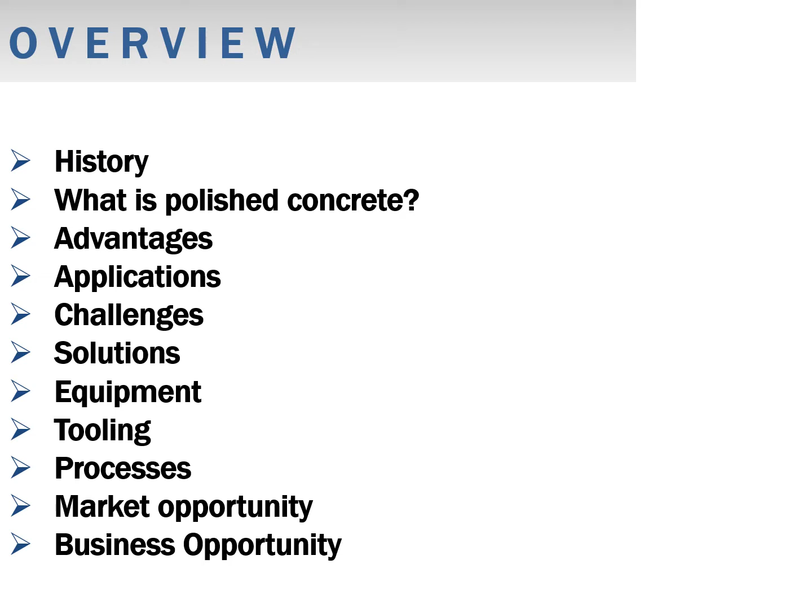Today's webinar is going to talk about the history of polished concrete, what exactly it is, the advantages of polished concrete, some of the applications we see it in, the challenges that are associated with polished concrete, and some of the solutions that we can incorporate. Then we'll go on to discuss the equipment, tooling, and processes of polished concrete, and finally we'll talk about the market and business opportunities available.

So let's talk briefly about the history of polished concrete. Polished concrete is actually a relatively new entry into the flooring surface world. Prior to 1998, polished concrete was associated with terrazzo. We all know terrazzo as being glass, marble, or granite chips, typically bound up in a cementitious or epoxy binder, and then that surface is prepared using carborundum stones and water. That is radically different than what actual polished concrete is.

The true first polished concrete surface occurred quite by accident. It was during a Tunisian palace renovation back in 1998, where the construction crews were forced to prepare the concrete slab without the use of water. During the grinding process, they noted that the slab was taking on a very beautiful sheen with a very nice aggregate exposure. Following it to its logical conclusion, they ended up with a very beautiful polished concrete slab.

Shortly thereafter, in 1999, the first planned installation of a polished concrete slab was undertaken at the Bellagio Hotel in Las Vegas, where a 40,000 square foot warehouse space was polished. And from 1999 to today, U.S. tool and equipment manufacturers, as well as chemical manufacturers, have refined the process and continually improved it.

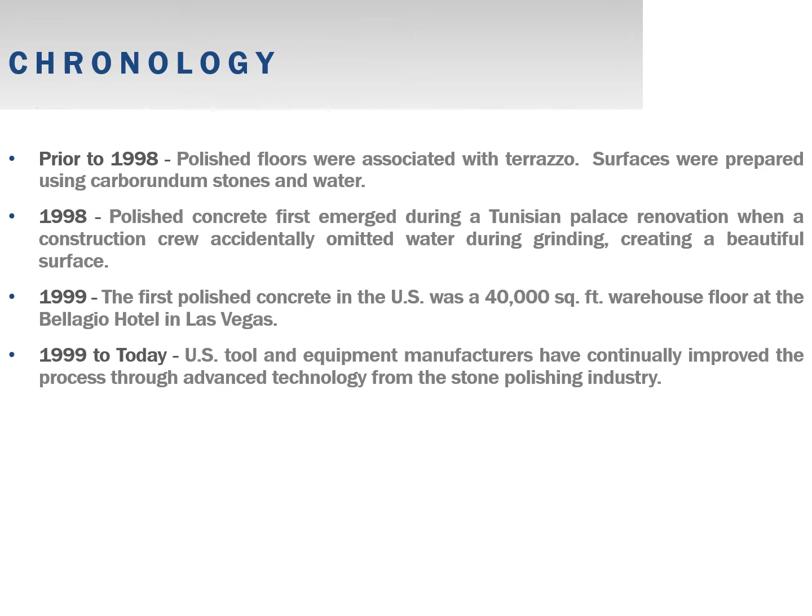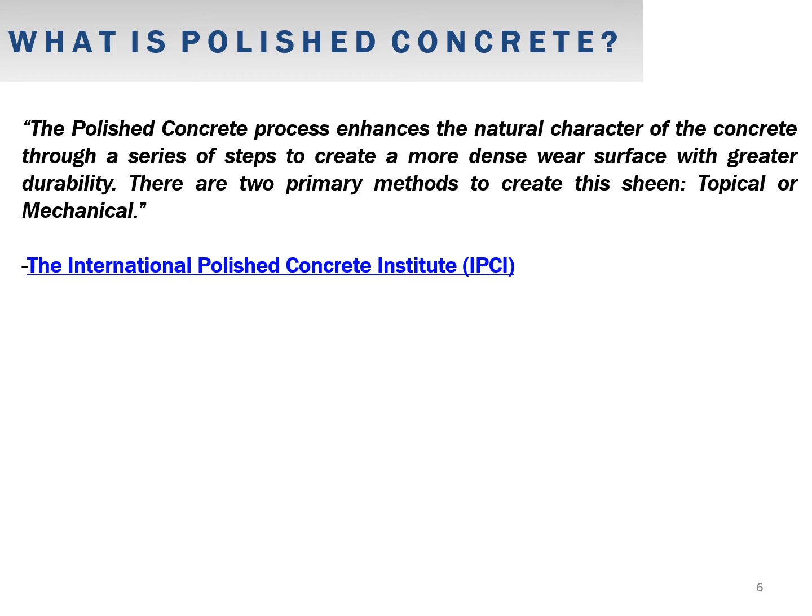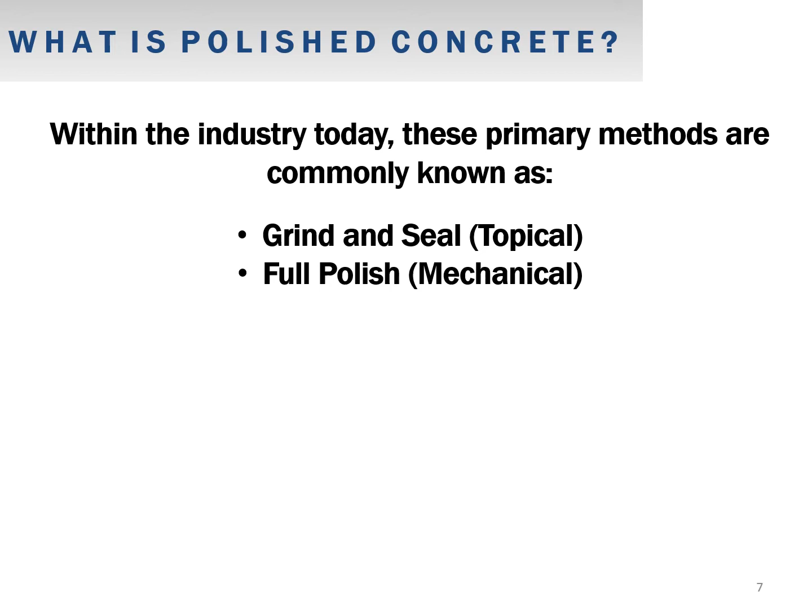So what exactly is polished concrete? Well, according to the International Polished Concrete Institute, polished concrete is defined as a process which enhances the natural character of the concrete through a series of steps to create a more dense wear surface with greater durability. There are two primary methods to create this sheen: topical or mechanical. Within the industry today, these primary methods, the topical and mechanical, are better known as a grind and seal or a full polish.

Whether it's a grind and seal application or a full polish, there's an organization out there called the Concrete Polishing Council, and they are a sub-council of the American Society of Concrete Contractors, and they have defined three different classes of aggregate exposure. Aggregate exposure and the sheen of the concrete are the two biggest considerations when dealing with a polished concrete floor.

So with the aggregate exposure chart that we see here, you'll see that the CPC has defined a Class A aggregate exposure as revealing 85 to 95% of the cement fines. So basically, all you're going to see in a Class A installation is the cement fines. With a Class B, you're going to see the cement fines as well as the larger or medium-sized aggregate, and with a Class C, you're going to see the heavier, deeper aggregate. Now, obviously, as you go down in classes here from an A to a C, it's going to require a heavier grind to expose the deeper, more larger aggregate.

The important thing to remember here is that if a specifier or an architect or designer specifies a Class A aggregate reveal, which is largely just the cement fines, and the installer inadvertently cuts through to reveal the larger aggregate, there's really no going back at that point. You cannot repair an installation where you reveal the deeper aggregates when the finer aggregates were specified for the installation. So it's important to take note of that and be aware of that.

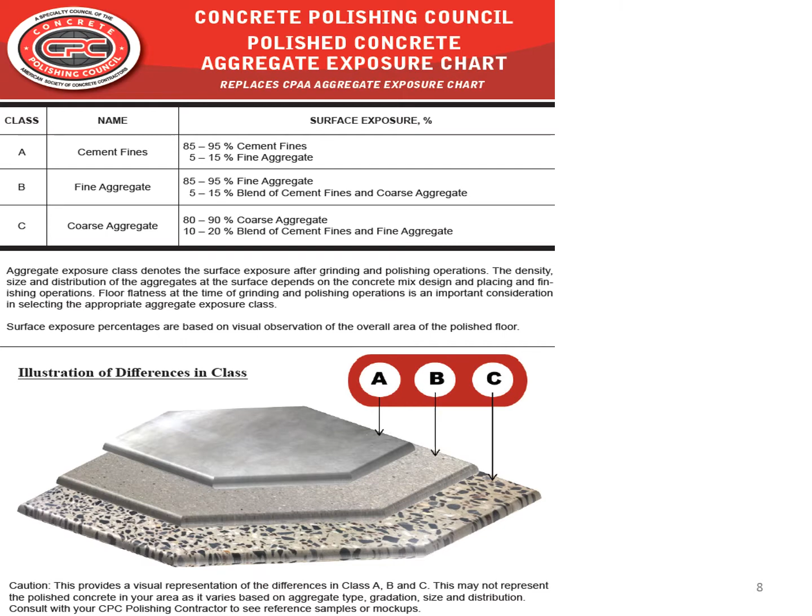Again, this is something that will be specified by the end user, by the designer or the architect. So if somebody is looking for a highly polished surface, you are going to get a highly reflective surface on the clarity meter. So it's important, again, to understand that this is not a subjective number, but a very quantitative number, and it can be the difference between a floor being accepted or rejected.

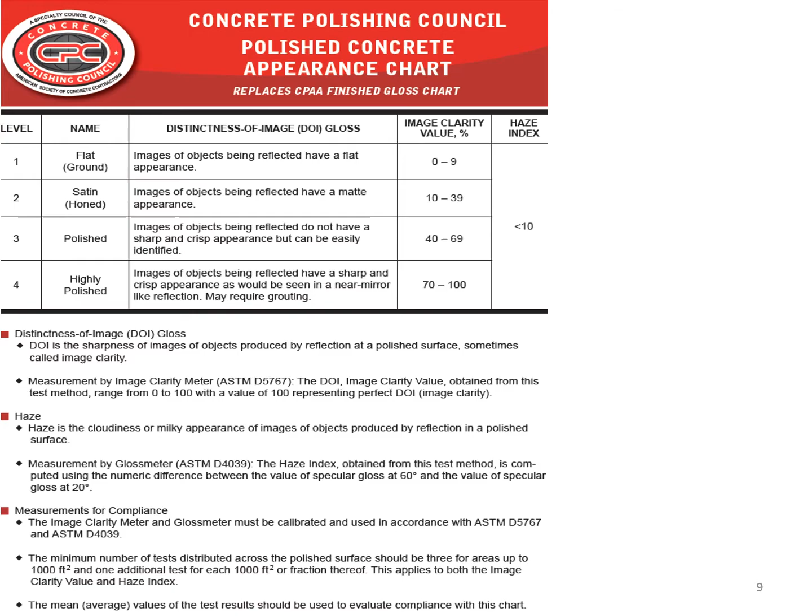Going back to the full polish or grind and seal method, there are some very distinct differences between the two. We'll start here with the full polish.

The full polish is basically a process of cutting, refining, and chemically treating the concrete surface. It consists of three stages: grind, hone, and polish. This method enhances the hardness of the existing concrete to create a sheen or finish level that ranges from low to very high gloss. The important thing to note is that the shine is achieved through the mechanical and chemical refinement of the surface of the concrete.

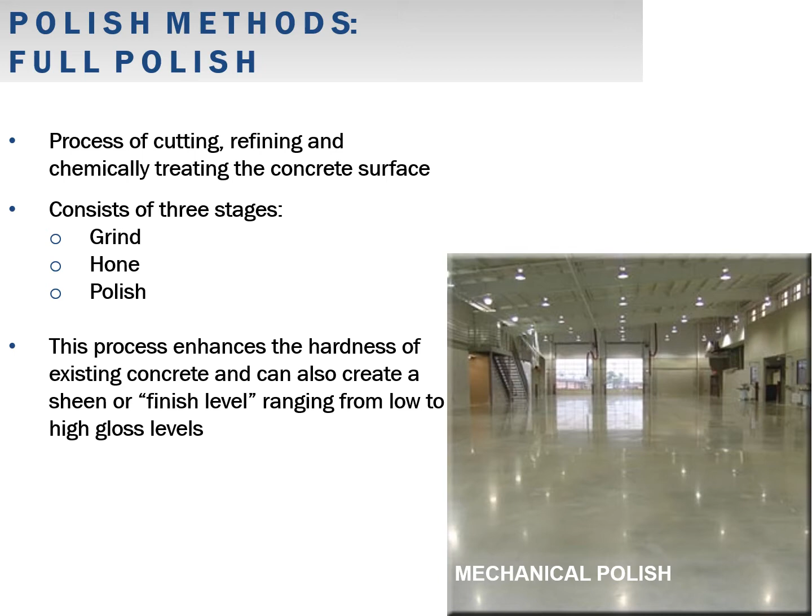Now this is in stark contrast to the grind and seal method. The grind and seal and the full polish actually do share some initial processing methodologies—we cut, refine, and chemically treat the concrete surface, and it also consists of the grind, hone, and polish phases. However, unlike a full polish, with a grind and seal the surface refinement stops at a much lower polish level, so you don't get the shine through mechanical or chemical refinement.

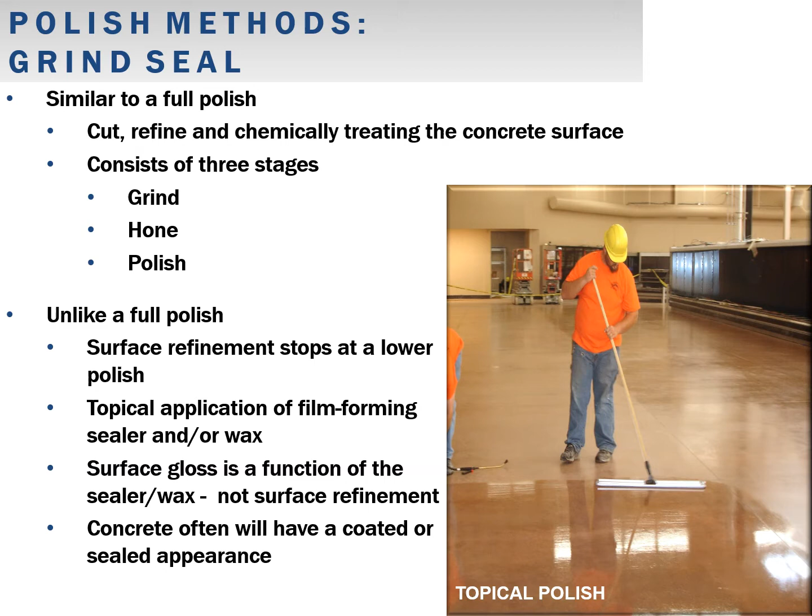The shine comes through the application of a film-forming sealer or wax. The surface gloss is therefore a function of the sealer or wax, not a function of the mechanical refinement of the surface. The disadvantage of this to a lot of people is that the concrete often will have a coated or sealed appearance—you won't have the same reflective clarity as with a full polished system.

So regardless if you're going to use a full polish or a grind and seal, there are two methods to achieve aggregate reveal and start processing the concrete: the wet method and the dry method. Contractors can choose between either one, and most will have the ability to do both.

Wet processing is oftentimes preferred because it extends the life of the diamonds. The diamond tooling is one of the most expensive parts of the polished concrete process. However, one of the issues with polishing wet is that it will create a slurry.

You can imagine if you're applying water to a process which is grinding the concrete and creating dust, that's going to mix with the water to create a slurry, which requires disposal in an environmentally friendly way. This is material that cannot simply be placed on a sewer drain or any public drain—it has to be dried out and turned into bulk material, whereupon it can be disposed into a dumpster.

Dry processing, therefore, is much faster because it eliminates the whole water component, so you don't have the issues associated with dealing with the slurry. However, you do require dust containment systems that are fairly robust, particularly with the OSHA regulations we've come up against in the last few years to protect the health of installers and workers.

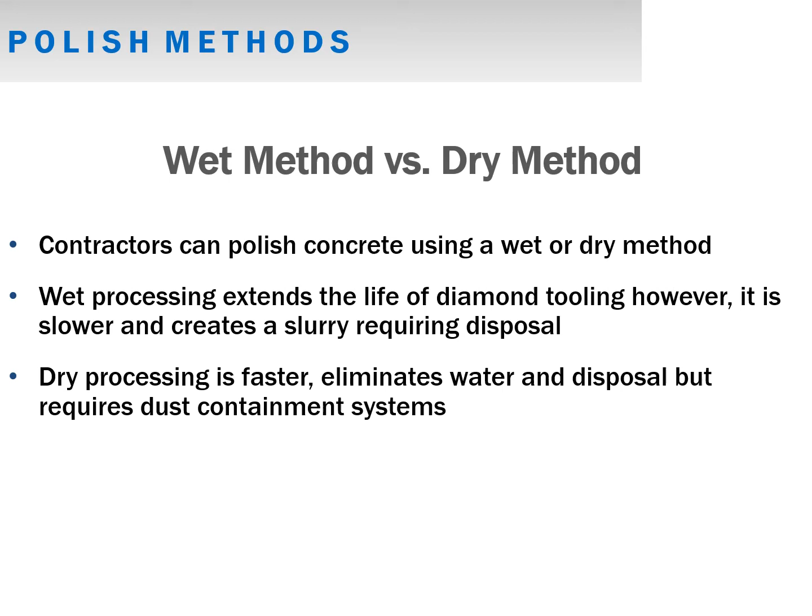But one of the downsides of the dry processing system is that the tooling, as a result of the friction created by grinding, will wear quicker than it will with a wet polishing system.

So which is better, full polish or grind and seal? Both have their advantages, but traditionally full polishing is often seen as the preferred method. There are several reasons why—number one, the extended longevity of the product. You're creating a higher refined surface than with a grind and seal.

Typically, you're taking it up to a 3,000 or 3,500 grit—we'll get into the grits later. But the point to note here is that you're more refining the surface to create a higher abrasion resistant surface. It's a higher refinement, a more dense surface, therefore higher abrasion resistance.

The aesthetics are another very big consideration. There's no filmy appearance—with a full polish system you get a very clear image, a very clear reflectivity. The DOI, the distinctness of image we referred to earlier, is much more clear than what you get with a film-forming sealer applied during a grind and seal.

And sustainability is a big issue. A full polish provides a finish that doesn't require the harvest, manufacture, or transport of additional materials—you're not putting any type of resilient floor covering on top of it.

As opposed to a grind and seal, there's no need to put on a film forming sealer that may be urethane or epoxy based. And you also have lower maintenance. I have to emphasize that lower maintenance doesn't mean no maintenance. There are some considerations with a full polish system using a penetrating guard product that we have to understand going forward, and we'll get into that a little later.

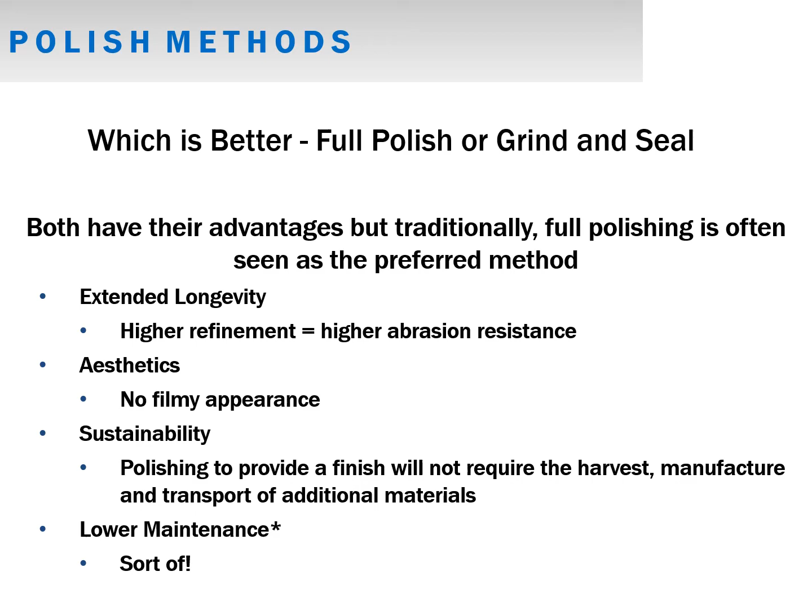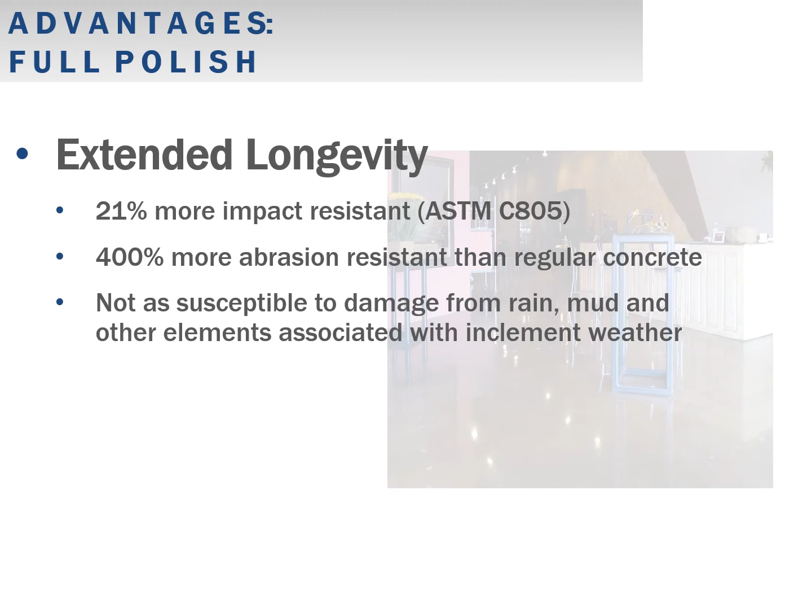So what are some advantages of polished concrete? We started to allude to them previously, and one is the extended longevity. With the highly refined surface, you get 21% more impact resistance measured according to ASTM C805, and about 400% more abrasion resistance than unprocessed or unrefined concrete. As a result, you're not as susceptible to damage from rain, mud, or other elements associated with inclement weather, so the life cycle is much longer.

A fully refined, full polished system creates a very dense surface. It's more spill and stain resistant - stain resistant, not stain proof, and we'll talk about that in a bit. But as a result of the higher refinement, you get a longer lifespan. You typically average about 60% lower life cycle costs compared to other floor surfaces such as coatings, resilient floor coverings, tile, stone, or even terrazzo.

Beauty is obviously one of the biggest considerations. It's a very aesthetically pleasing floor, very unique in the aesthetic it presents, and the clarity of reflection with a full polished concrete surface cannot be matched. Light reflectivity is something big that not a lot of people think about. If you have high light reflectivity, you get greater visibility, which equals lower artificial light requirements in general, and therefore lower utility costs.

It's also breathable - slab moisture will readily pass through a full polished concrete slab, so full polish is not a moisture sensitive floor covering or product. Some of the challenges we've all seen in recent years with moisture sensitive floor coverings aren't in play here with a full polished concrete slab.

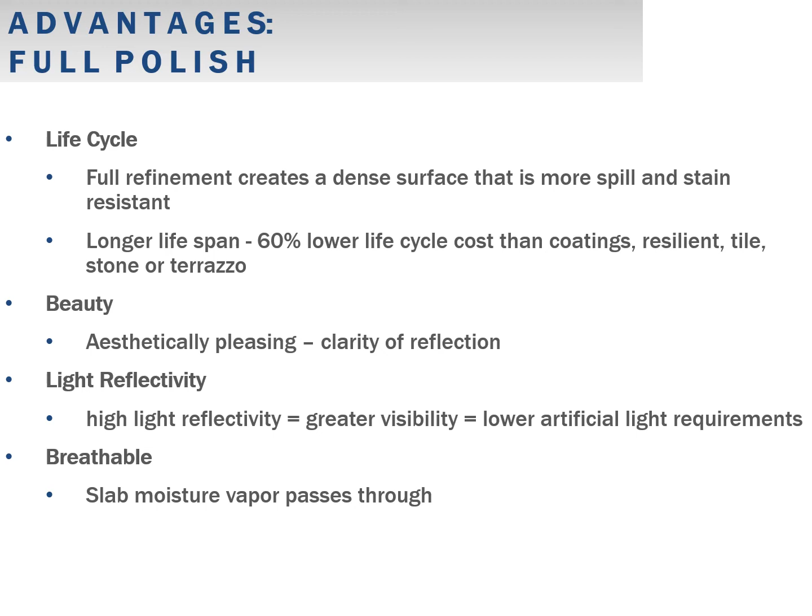Additional advantages are the sustainable and LEED credits you can achieve through specifying a full polished concrete slab. It's environmentally friendly - you're not using acrylics, epoxies, or urethane sealers over the surface, so there's really nothing to dispose of as you're remodeling. Using a structural slab as your finished floor surface helps contribute to LEED credits in materials and resources, energy and atmosphere, and low emitting materials. So it's a very sustainable floor.

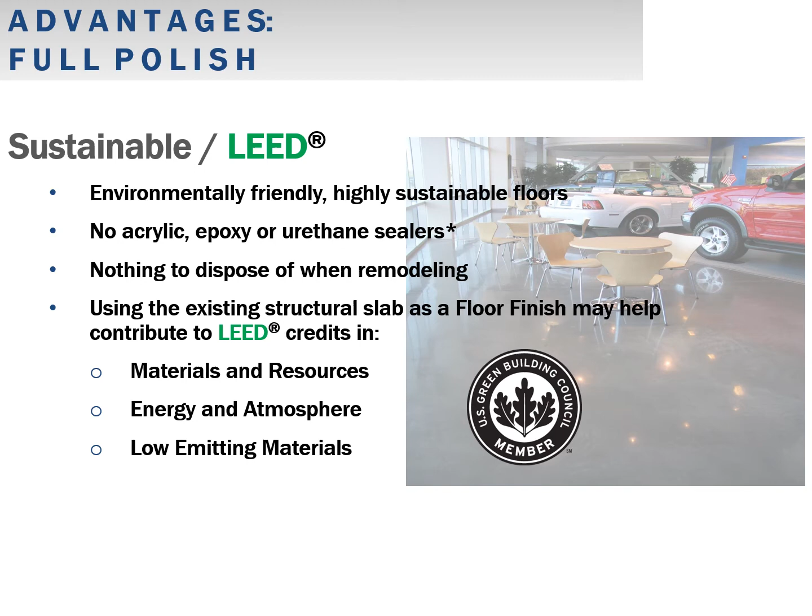One of the biggest advantages the polished concrete industry has touted for years is lower maintenance. It resists stains from oil, tire marks, and scuffs - I have 'resist' in italics because again we have to emphasize that it resists, it's not stain proof, so we'll get into that further when we talk about maintenance. There's really no specialized equipment needed for normal maintenance.

The typical cleaning methodologies you use on existing floor coverings in a building, whether resilient, stone, terrazzo, or ceramic tile, you'll be able to use on polished concrete. No special chemicals are needed - you can damp mop the polished concrete, however auto scrubbers are recommended as a good maintenance protocol. As a result of all these, you have a much lower maintenance cost overall.

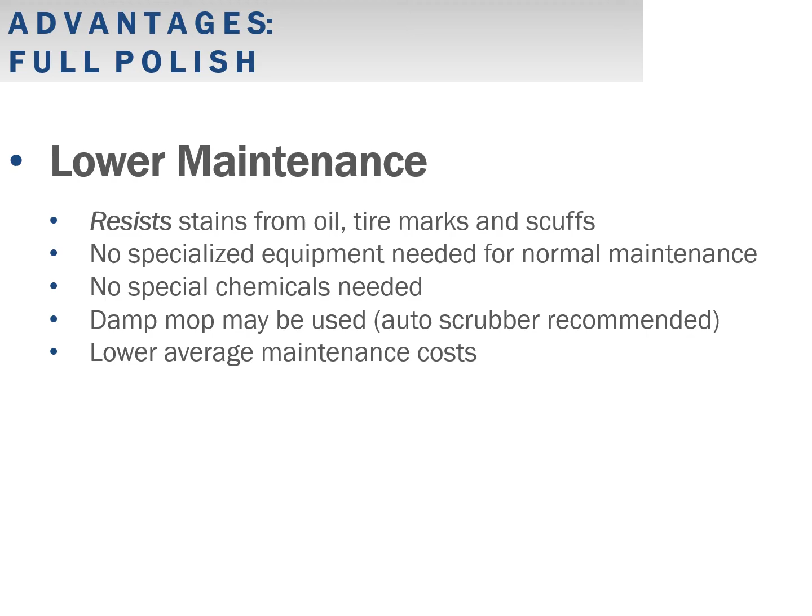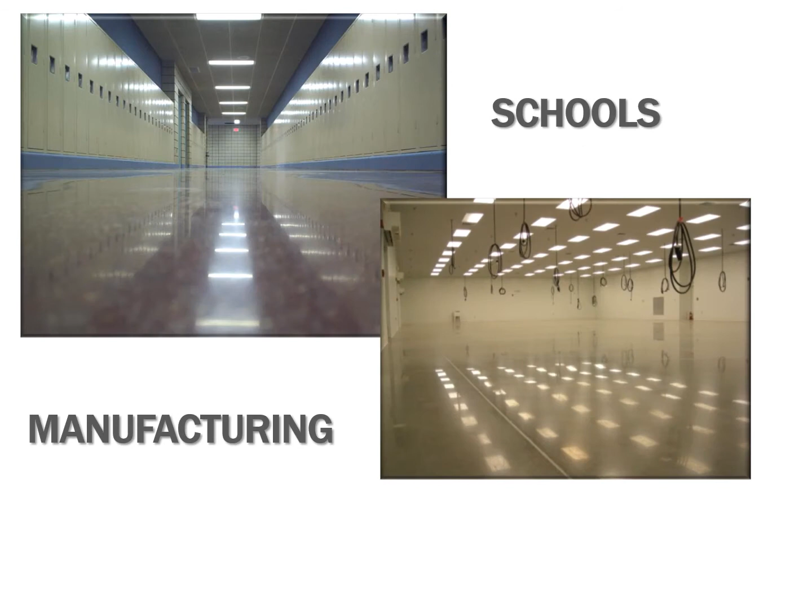Showrooms and restaurants, grocery stores and retail, schools, manufacturing, offices, aviation hangars, and big box stores.

Big box stores we left here for last because they're really the industry that introduced polished concrete into the public consciousness. Once we started to see polished concrete make its way into places like Lowe's and Home Depot, people started to pick up on the natural beauty of it. Retail outlets started to notice the lower maintenance costs associated with it, and that's really where it started to take off. We're starting to see it go into more traditional retail outlets, and special retailers like Target.

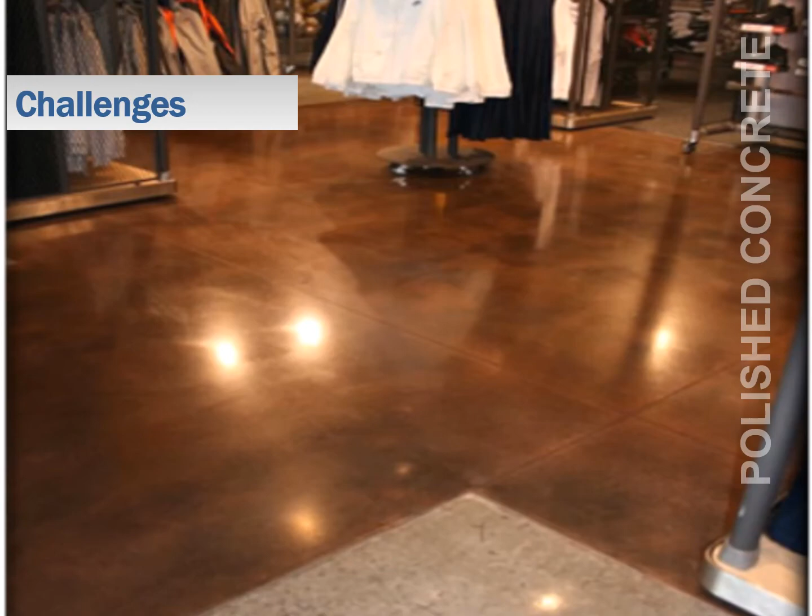So, having considered all that, it might logically be assumed that polished concrete is the perfect flooring solution, given all the criteria we just listed. Unfortunately, that's not the case. There are some challenges associated with polished concrete, and some of those challenges are as follows.

From the owner's perspective, some of the challenges are that the colors are inconsistent, or not what they're expecting. With an existing slab, you're limited to what you have as far as the paste is concerned and what color that's going to present. The uniformity of aggregate reveal is a big consideration - you can get spottiness with an existing slab, high and low aggregate reveal. Substrate issues such as patches, trenching, and ghosting are very apparent with the installation, and the owner wasn't expecting to see those. The floor may not be as shiny as they wanted.

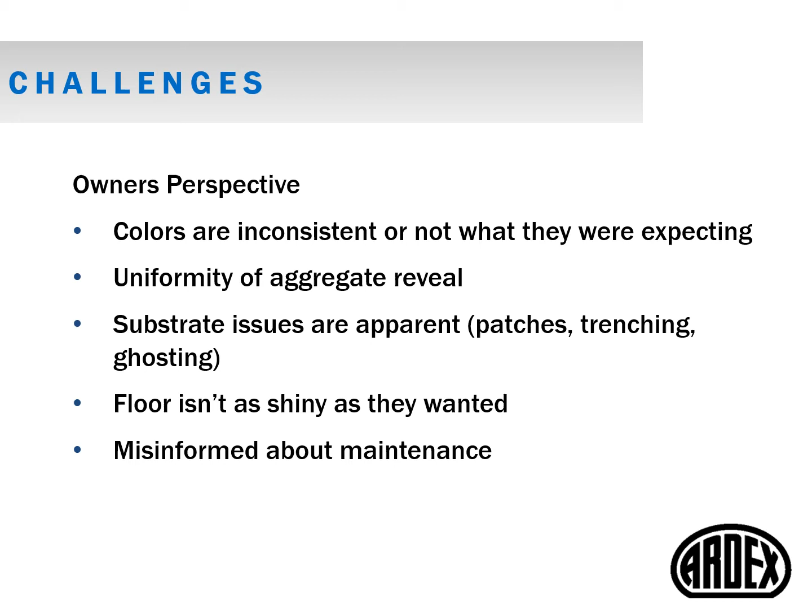Again, it all comes down to the quality of the concrete being processed. The end user or owner is often misinformed about maintenance - this goes back to the idea that polished concrete has been positioned as a very low maintenance product. While it is not a no-maintenance product, we have to emphasize to all parties that maintenance is still a critical part of the polished concrete decision.

From an architect or contractor perspective, there are additional challenges. One of the big things is that there's a lack of control over the final aesthetic - you have to deal with the concrete as it is. You are presented with the slab and it is what it is, so there's really no guarantee of how that's going to turn out.

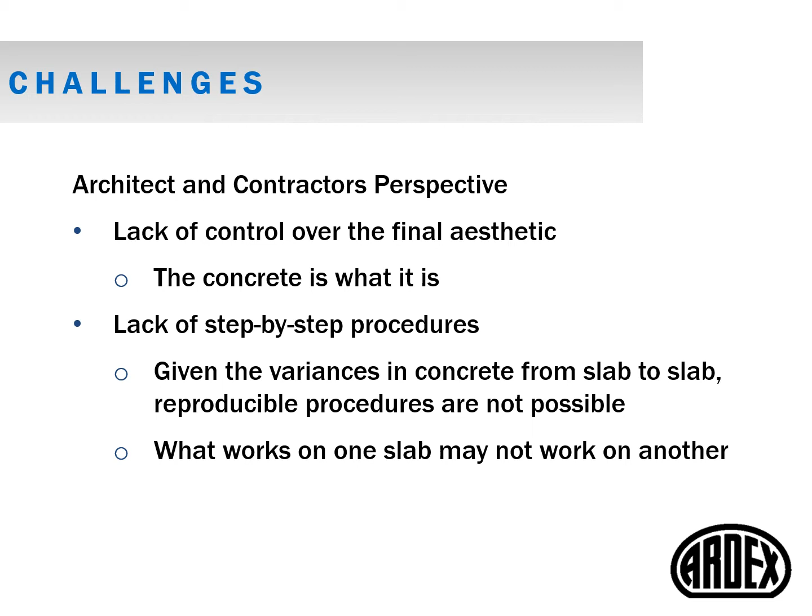There's also a lack of step-by-step procedures. Given variances in concrete from slab to slab, we really cannot guarantee any type of reproducible procedures, so what works on one slab may not work on another. The architect and contractor, when presented with those facts, oftentimes aren't too keen on accepting it because they like to have a better idea of how they're going to achieve the final result based on well-defined processes.

From the installer's perspective, it's similar to what we saw with the contractor and the architect - every slab is unique. You really don't have any control over the slab, so you may have mix design variables within an existing slab or installation space. There could be surface imperfections such as cracks, existing patches, trench infill. Ghosting of previous floor covering is a big issue, and floor flatness and slab curl are also big issues.

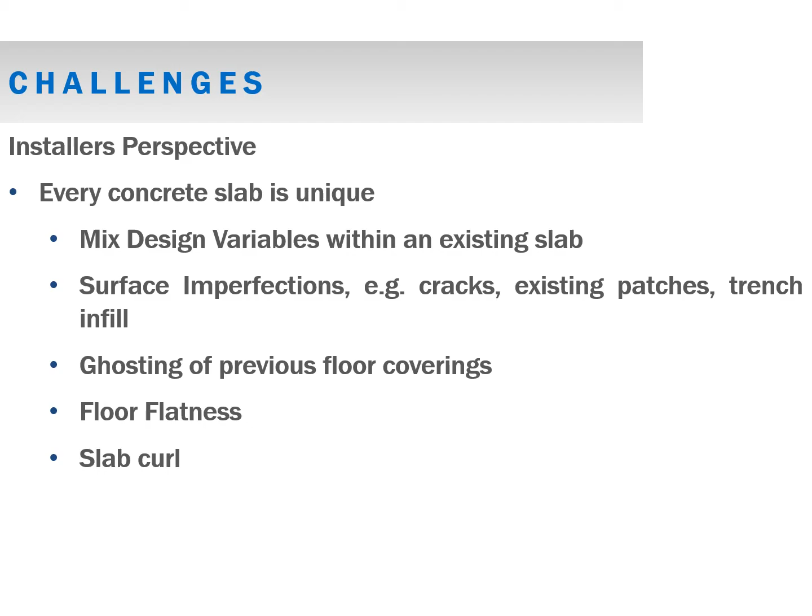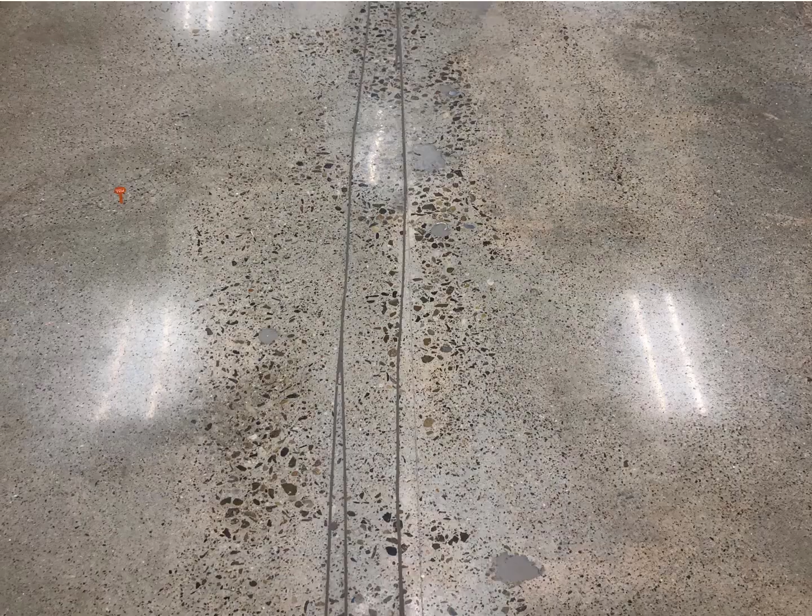Cracks within the existing concrete. Here you can see some linear crack tone. These may be saw cuts that were installed, or maybe shrinkage cracks associated with the original installation. While they were repaired appropriately and the area polished, you can see they will pop and be more pronounced. So if you have an existing crack in the concrete that's been repaired, the end user should have every expectation that they will appear in the final aesthetic.

Slab curl and differing aggregate reveals. You can see here where we have an isolation joint in the slab, different slabs poured probably at different times. The point is we have cold joints there, so we had the opportunity for the slab to curl slightly. As you cut it, you get a much deeper, heavier reveal of the aggregate at the perimeter, where the slab may be slightly curled up, because you're removing more material than in the field of the installation. So you get a heavy, coarse aggregate reveal versus within the body of the slab, where it's more fine and medium aggregates.

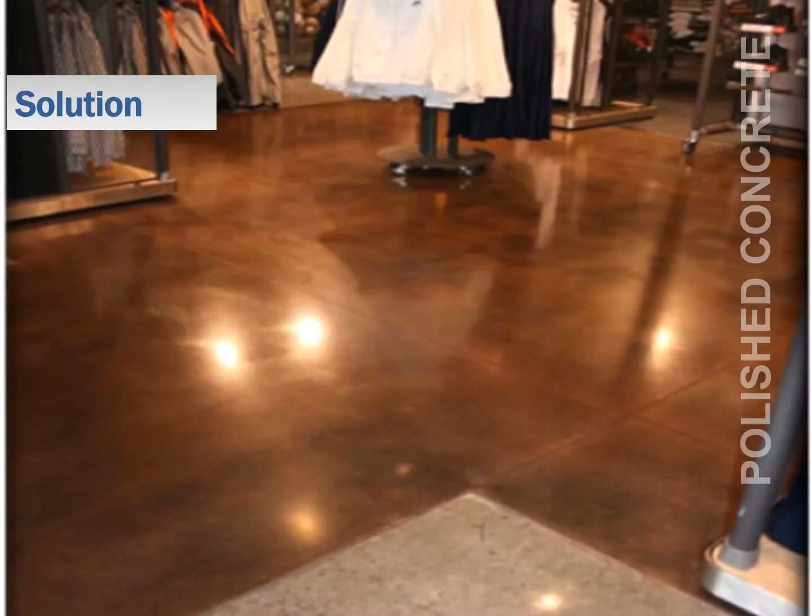However, a lot of end users want a little bit more predictability. They want to know they're going to have a more even aggregate reveal. They want to cover up some of the cracks of the existing concrete. They don't want to see these types of grid patterns. So if your end user or designer desires that outcome, we had to look at some different alternatives. So what are some of those alternatives? What are the solutions to some of the challenges we saw in the previous slides?

Well, the big one is the polishable overlay. The polishable overlay presents some very big advantages over polishing the existing slab in terms of achieving a predictable result. And the way we do that is by controlling not only the product control, but also the process control. When we control those two components, we have predictable results. So what do we mean by product control? Well, the substrate prep products and polishable overlays that will be installed are factory controlled, they're quality controlled. We know how they're going to mix and install, and what's going to achieve a predictable result with the material that's being poured.

In conjunction with that, we know how to process it. The polishable overlays have been dialed in to the point where we understand the processes, the type of equipment that needs to be used, the type of tooling, and the type of chemicals that will work on these materials. So there's really no variability. We've been able to identify whether it's HTC equipment, Diamatic, SASE, or whoever, the specific equipment and tooling that can be used to process the overlays successfully.

Along with that, you get the installation contractor and nationwide distribution networks. Whether it's ARDEX or a competitor, there are contractors that have been trained with us. We have distribution networks that are able to provide the proper priming products as well as the polishable overlay products themselves. And when installed in accordance with their written recommendations, we have a predictable result.

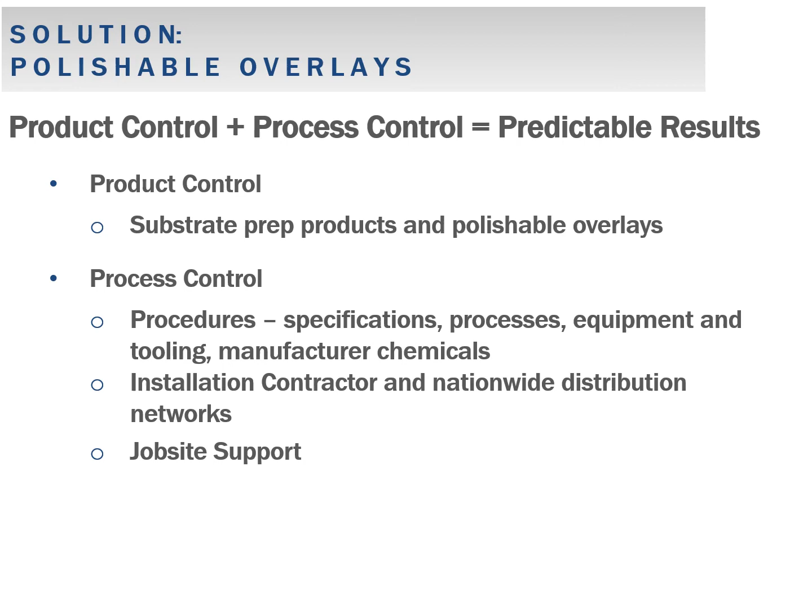Another consideration with polishable overlays is that you're able to not only topically dye and stain, which you can do with the existing concrete slab, but more importantly, you can actually include integral dyes with the polishable overlays. This gives you a lot more design options, and a much more robust and vibrant color palette to work with as well.

While topical dyes and stains are great, they typically are reactive and can only color or stain the concrete up to a depth of maybe a 16th or an 8th of an inch. Whereas with an integral dye, you'll have that color dyed all the way through the product. So if something were to fall or chip the concrete or the overlay, that color runs through the material, so it won't be nearly as obvious.

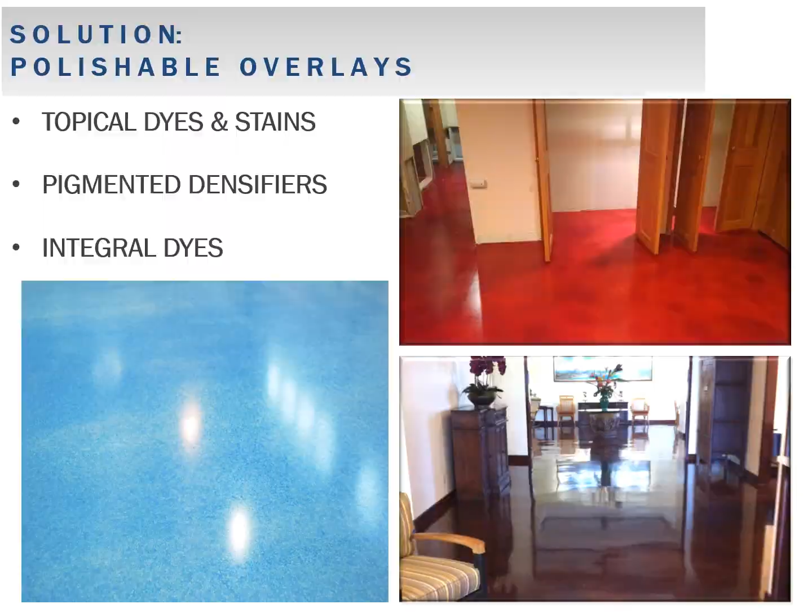So if we're going to go with the polishable overlays, if that's something we want to consider, what's the process for incorporating them into our project?

Well, it comes down to what we're all familiar with when it comes to our underlayments. The first thing is we have to have proper prep. And what we mean by proper prep, we've all read this in innumerable ARDEX letters and technical data sheets: all concrete must be sound, solid, and clean. That's the golden rule. We want to make sure there are no bond breakers on the surface - no oil, grease, dirt, curing compounds, anything that's going to interfere with the bond of the ARDEX priming system to the concrete.

Typically, we're going to require an ICRI surface profile of 3, and this is because we're going to be using a two-part, 100% solids epoxy priming system. Whether that's the EP2000, the MC Rapid, in the case of ARDEX, any manufacturer of a polishable overlay is going to highly recommend, or actually require, the use of an epoxy sand-broadcasted priming system.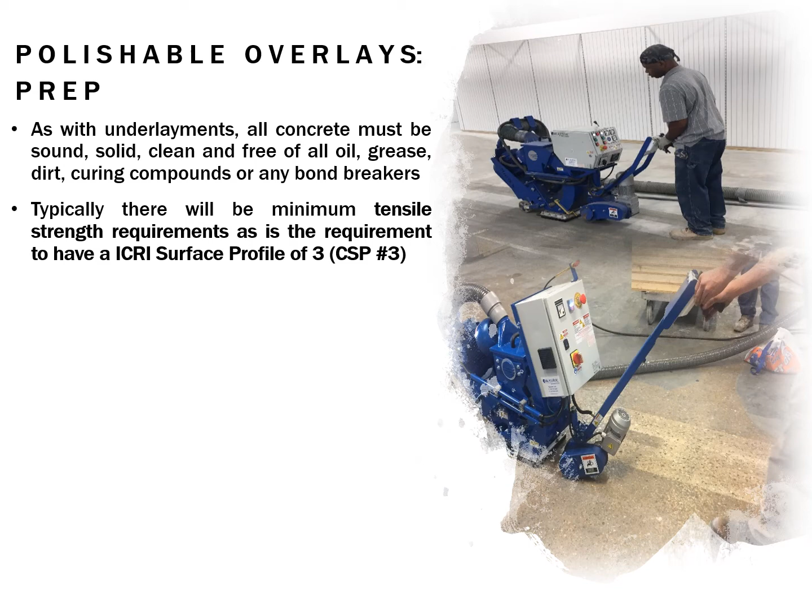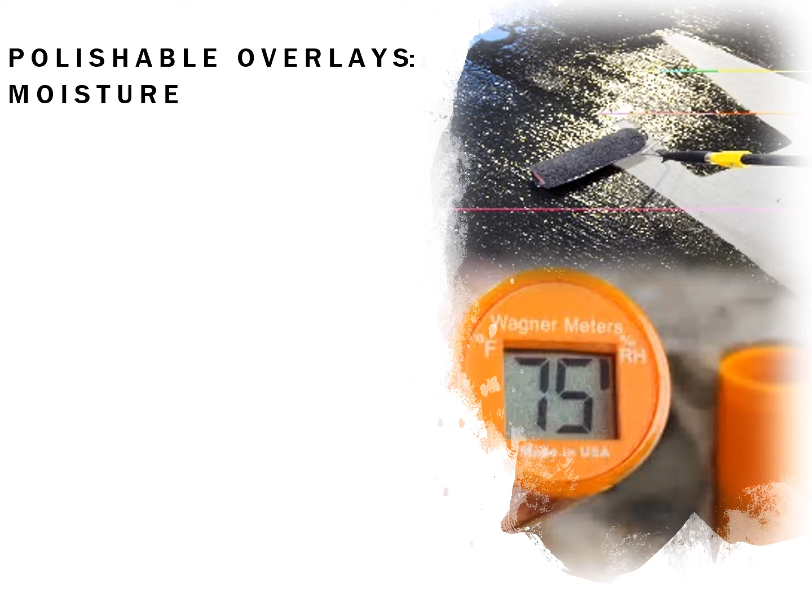So with polishable overlays, is moisture a consideration? Not so much with a full polishable overlay, but if you're going to do a grind and seal, moisture is absolutely a consideration, and we can detail that later. But it's just a good idea in general to have an understanding of what the moisture content of your slab is, so we're going to want to test in accordance with ASTM F2170.

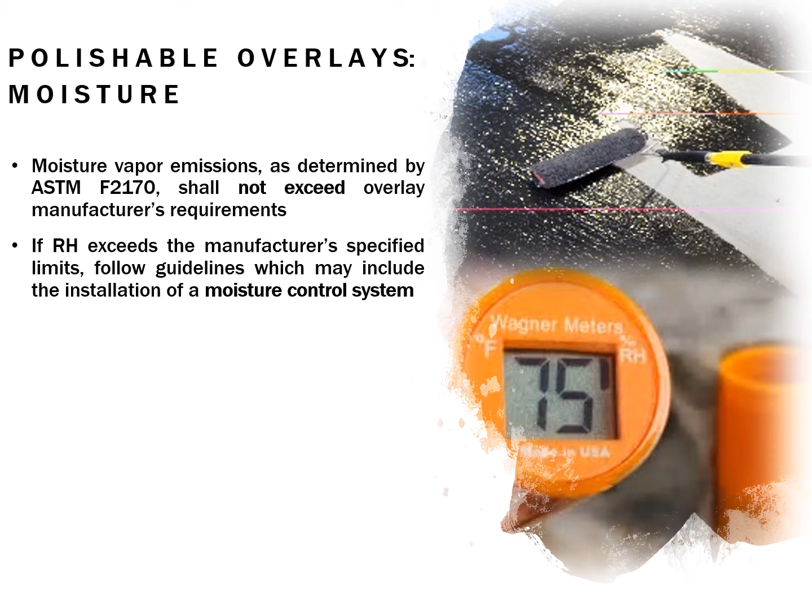We're not going to want to exceed the manufacturer's recommendation for their overlay material, particularly if it's a grind and seal. But if it does exceed the moisture recommendations or specification limits of the manufacturer, then we're going to want to use a moisture control system. In the case of ARDEX, you can use the ARDEX MC Rapid. The nice thing about that application is that it can also be used not only as the moisture control system, but also as the priming system as well. So there's no additional step if there's high moisture in the concrete - we can use the MC Rapid as a priming system as well as the moisture control system.

As with underlayments, we want to make sure we treat joints and cracks appropriately. We have to honor all existing joints and cracks that are moving. That does not change. Whether it's a resilient floor covering, stone, porcelain, terrazzo, or polished concrete, you have to honor all moving joints up through the installation.

These include expansion, control, or isolation joints. However, all non-moving joints that are dormant, including a saw cut that's been activated, we can repair with something like the ARDEX ARDIFIX product and go over top of them. The important thing is it's got to be dormant and it has to be repaired. We're not talking about patching or filling a crack, we're actually talking about repairing a crack, and that's where the ARDEX ARDIFIX product comes into play.

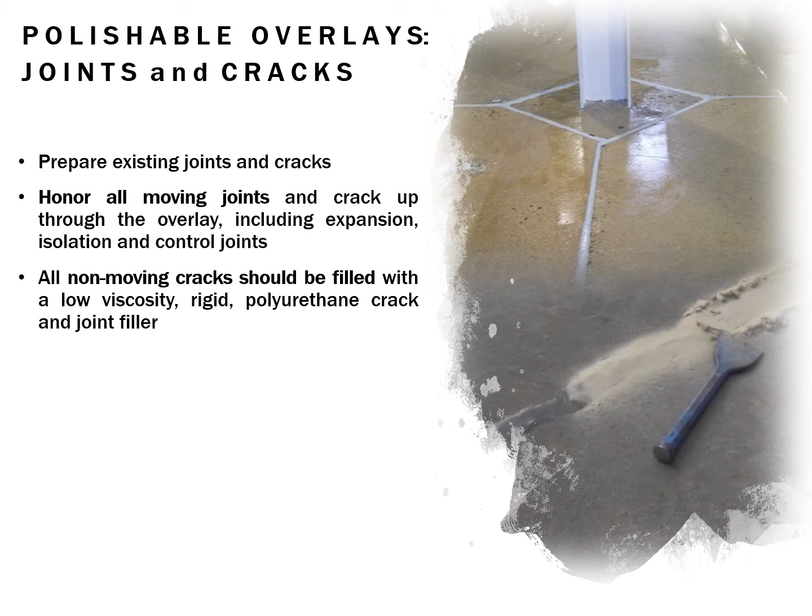Once we've done our proper prep and treated our joints, we're going to prime with our 2-component 100% solids epoxy, whether it's the EP2000 or the MC Rapid. We want a very rigid base underneath our overlay. We need this for a couple reasons: number one, it helps reduce hairline cracking and potential telegraphing in from the slab below. Also, the grinding equipment we put over these polishable overlays is extremely heavy, and when you put something that heavy over a micro topping installed typically no more than 3/8 to half an inch, we want to give it the best chance of success by making sure it has a very rigid base.

The application of the primer, the 2-component 100% solids sand-broadcasted epoxy, is also used to fill any type of micro cracks in the surface of the concrete. We can't possibly chase out all the spider cracking throughout the surface of a slab, obviously, but we could use the epoxy priming system to fill in those very fine cracks.

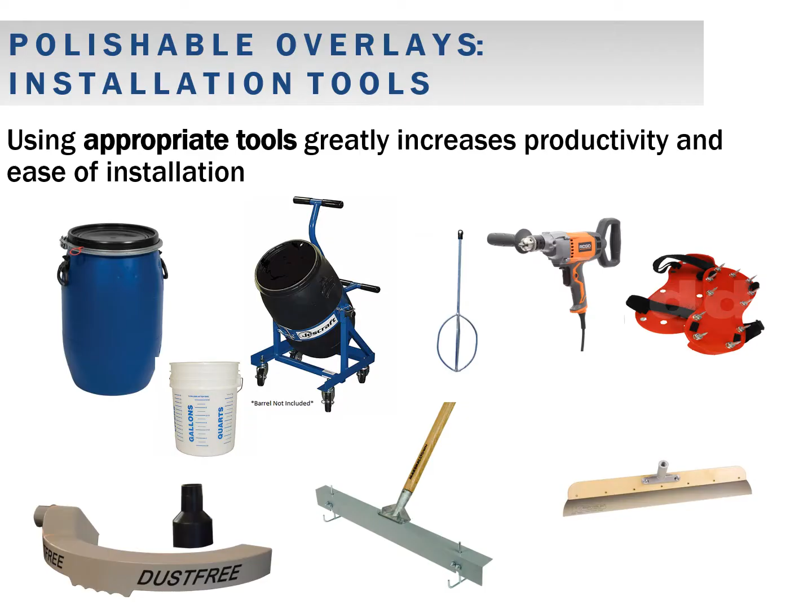So once we have our prep addressed, our cracks handled, and installed our priming system or moisture control system, we're going to install our overlay. These are some of the tools we'll use with our overlay systems, and you can see these are the same tools we use with our underlayment products - everything from the gauge rake to the smoother to the cleats, the drill. We're really not doing anything out of the box in terms of placing the material. It's going to be very similar to what we've been doing for years with our underlayment products.

One question we get often is about the spike roller - should we use it to spike roll or not? That's the question. The spike roller presents a couple challenges. The biggest challenge is, number one, it leaves a very distinctive pin dot pattern in the surface.

The spike roller is typically used in place of the smoother to break the surface tension of the material, to allow it to sit flat and smooth. When you do that, it leaves a pin dot cushion type of look in the surface. That will not be able to be ground out. So if your end user is okay with that look, by all means use a spike roller. But if they're not, don't proceed under the assumption that you can spike roll it and just grind out that pattern - you're not going to be able to do that.

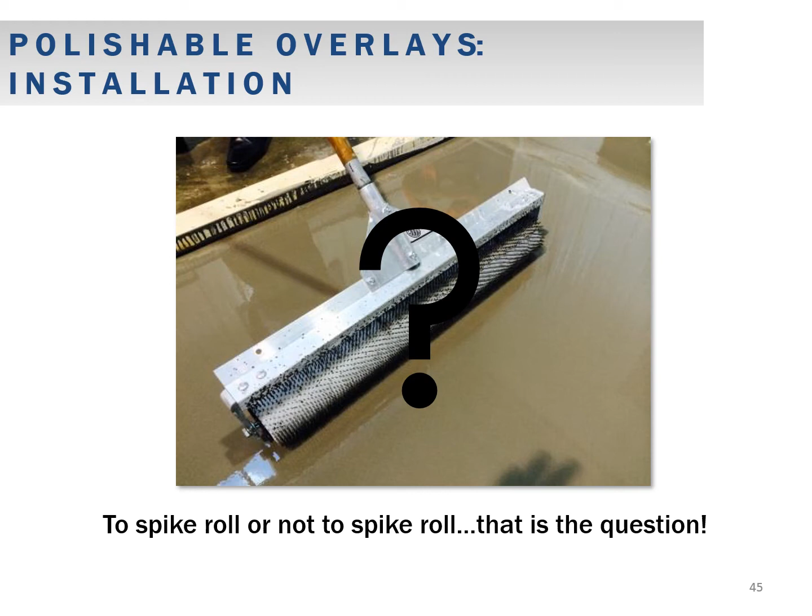The other consideration with the spike roller is that when you use it with our heavier aggregate materials such as the 521 or the 523, or any material with a heavier aggregate in it, the spikes can push the aggregate deeper into the mix, which makes it harder to get down to that aggregate when you start to grind. So it's more difficult to get a good, even aggregate reveal. Those are two considerations to look at when evaluating use of the spike roller. Personally, I don't like the use of it. If you're going to use it on a polishable overlay, we recommend you follow it up with a smoother over the surface to try and eliminate some of that patterning.

So with the installation, a couple good conventional work practices to follow: as with underlayments, you want to strictly honor the powder to water ratio. If anything, you want to be more strict when doing an overlay material. You have to remember, this is the finished surface, so you're not putting anything over top of it - you want to make sure you get this part right.

I tell folks all the time, the most important part of a polishable overlay isn't the processing, it's the placement. If you screw up the placement of the polishable overlay, there's no way to salvage it with the grinding process. So it's very important to make sure you honor the powder to water ratio.

It's also important that you pour the material in rapid succession to make sure you get good blending from batch to batch. We want to blend each individual pour by intermingling them. As we're running down a wall and go back to the starting point to do our second row, we want to push new material into old material to blend them together. If you don't, after processing, you can get what's called ribboning, where you can see each line of pour. So you want to push material into the existing material and pull it back out to marry those two pours together.

This obviously implies you have adequate manpower. I will stress highly, a polishable overlay is not something you can do with a skeleton crew. You have to have adequate manpower, and you have to do the pre-job planning.

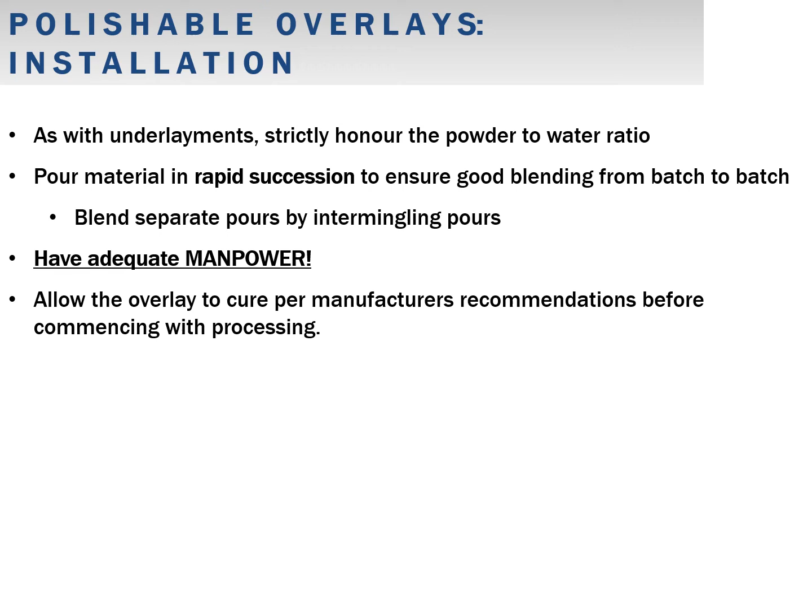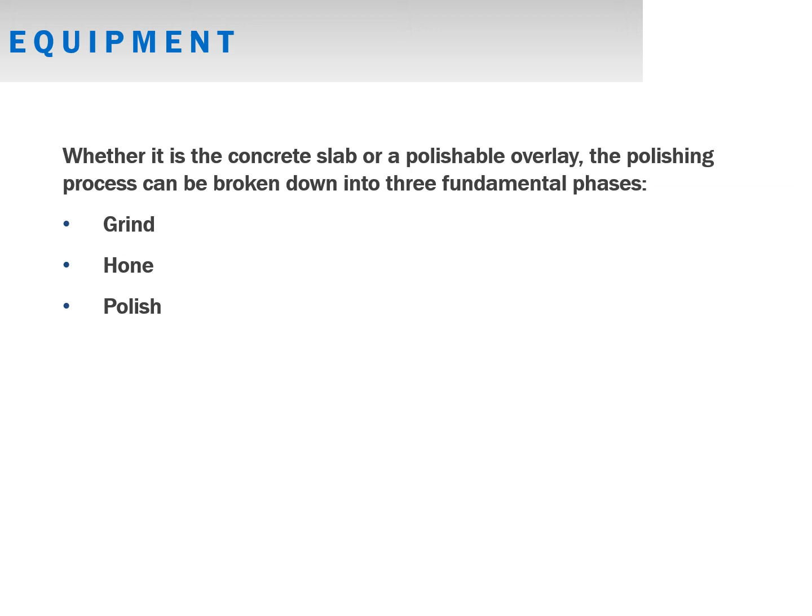So once we begin processing, what are we talking about in terms of equipment and tooling? As a quick refresher, we're going to do a grind, hone, and polish on these materials, just as we would on polished concrete. So what are we going to be talking about here in terms of equipment?

We're looking at planetary grinders if we're doing a dry polish system, and I'll tell you right now, ARDEX products are dry polish only. You want to make sure you have adequate vacuum and dust collection equipment. Most manufacturers of planetary grinders have a dust collection system that meets and exceeds OSHA recommendations.

You also want to make sure you have an edge grinder and high-speed burnisher. A lot of times installers forget these two components, and this is actually where most jobs go south. If you're not able to blend the edges appropriately with the field, you're going to have a problem with picture framing, and that's something most end users won't accept. So you want to make sure you have the proper edge grinding equipment.

Edge grinding should be performed prior to grinding the field. It's something that should not be minimized and should be figured into your jobs when bidding, because edge grinding is probably the bigger portion of your labor costs when it comes to processing the installation.

And a high-speed burnisher, specifically a propane high-speed burnisher. The benefits come into effect particularly with a full polish system where you have to burnish in the guard products at the end. You need the speed of a high-speed burnisher, over 2,000 RPM, but you also need the head weight. There are a lot of burnishers out there that bill themselves as high-speed, but they don't have any head weight. They operate off a standard 110 outlet, but they're not giving you the horsepower or weight to heat up that guard product to melt it into the surface of the polishable overlay or the concrete.

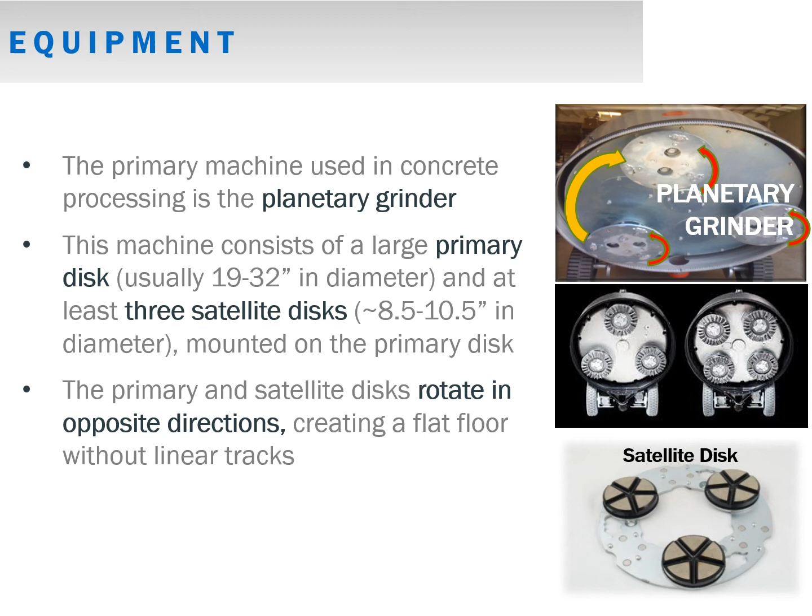When we talk about tooling, we're actually talking about the diamonds that do the actual cutting, honing, and polishing of the concrete or the polishable overlay. We'll get into each of these individually in a few minutes. The important thing to note here is that the diamonds we're talking about are bound up in a matrix.

When we're talking about cutting, we're talking about a metal bonded diamond. In other words, we have diamonds that are bound up in a metal matrix. When we're talking about honing, we're talking about diamonds that are bound up in either a ceramic or copper type of matrix. And with polishing, we're talking about diamonds that are bound up in a resin bond.

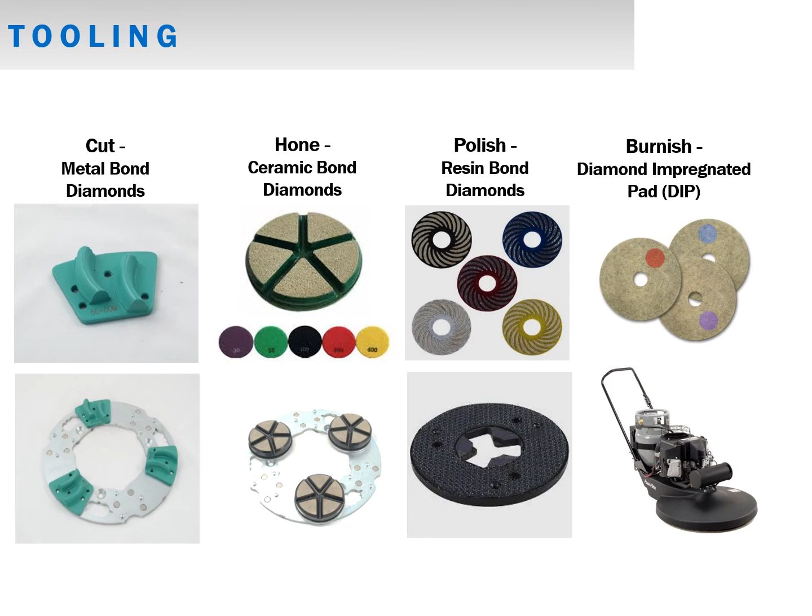As we alluded to in the last slide, diamonds are what do the actual cutting, honing, and polishing of the concrete or polishable overlay. Those diamonds come in a variety of different sizes based on their function in the process. For instance, with a 30 or 35, we're looking at an average diamond size that's significantly larger than the grit size of a diamond in a 3000 pad. The important takeaway here is that the lower the number, the bigger the diamond.

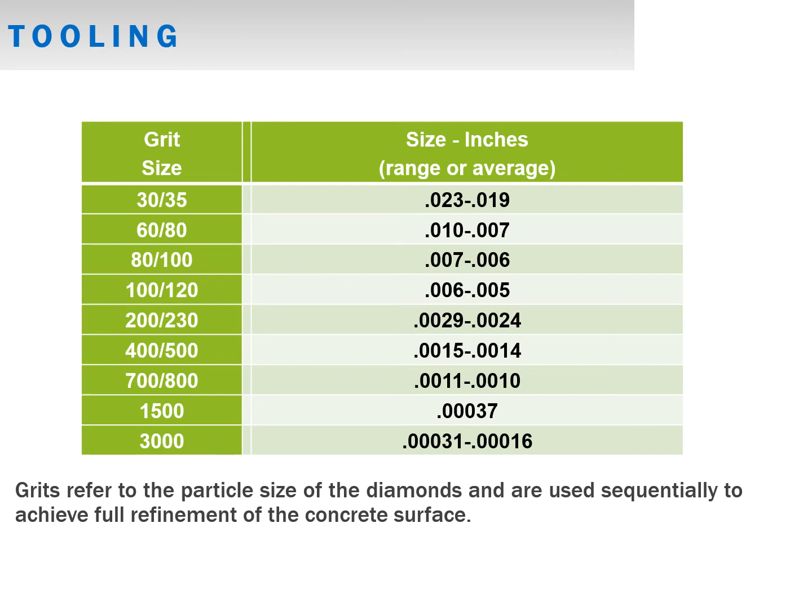It's similar to sandpaper when we're sanding wood. Same concept - we're going to do our bulk removal with the lower grit sizes, and we're going to refine up through the higher grit sizes to get the refined surface.

So now that we have an understanding of what the equipment and tooling is, what are we talking about when we're talking about processing the concrete or the polishable overlay?

Processing of the concrete or polishable overlay begins with the grinding phase. The grinding phase incorporates the metal bonded diamonds that we referenced earlier. These are the diamonds that have a much larger grit size. The metal bonds are used for the first cut, potentially the first several cuts, depending on how hard the concrete is. Typically they'll range anywhere from a grit size of 30 up to 200, and these diamonds are used for the bulk removal of material.

This is where you're going to get your aggregate exposure. These will remove the heaviest amount of material, and by doing so, it also creates a scratch pattern on the surface of the concrete that will be removed by the successive stages, which include honing and polishing.

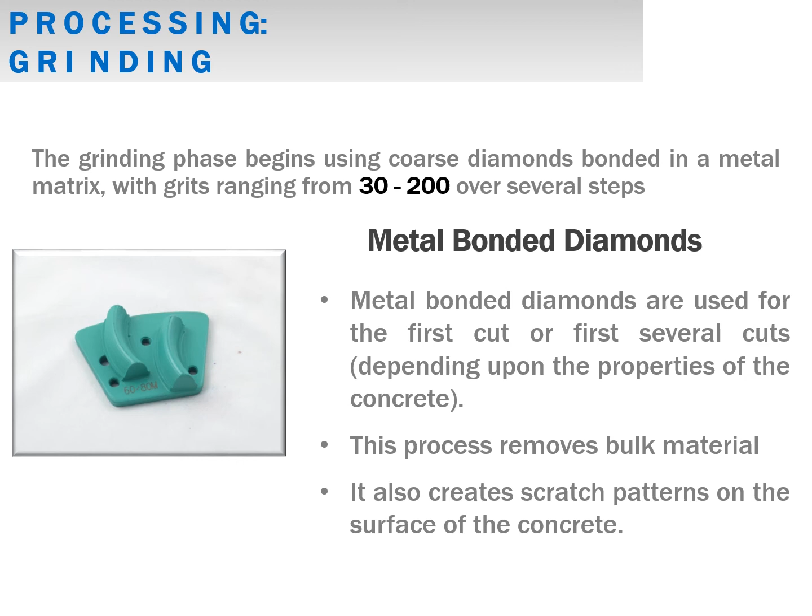So after we remove our bulk material, we're going to have to now remove the scratch pattern that was left by the heavier grit diamonds in the metal bond. So now we move into the honing phase, and the honing phase incorporates the use of ceramic bond diamonds.

Now these diamonds are typically smaller. They range anywhere from a grit size of 50 up to 200. They are bound up in a ceramic or copper matrix traditionally, and these tools are used to create finer scratch patterns.

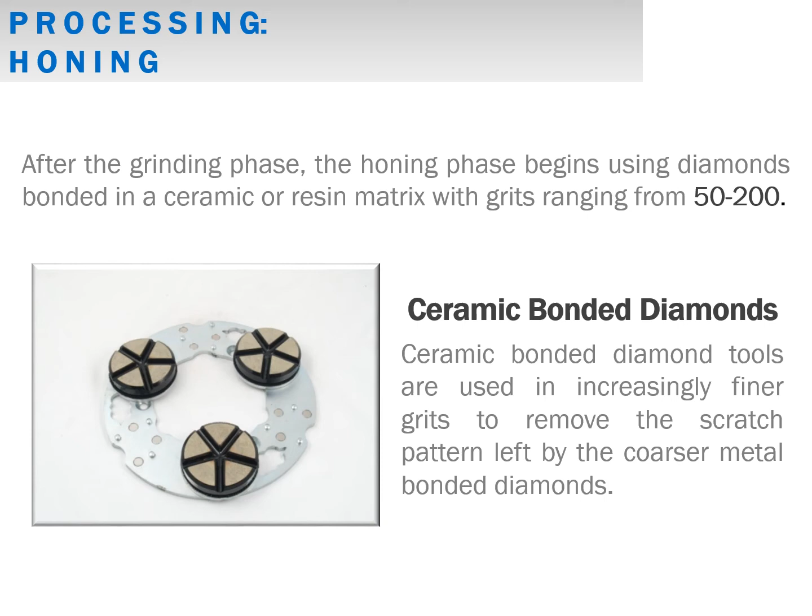So the honing phase will introduce its own scratch pattern into the surface of the polishable overlay or concrete, but it's going to replace the deeper scratches that were left by the metal bonded diamonds. By the time we reach the end of the honing phase with the ceramic or copper bonds, basically all the scratches should be removed at that point.

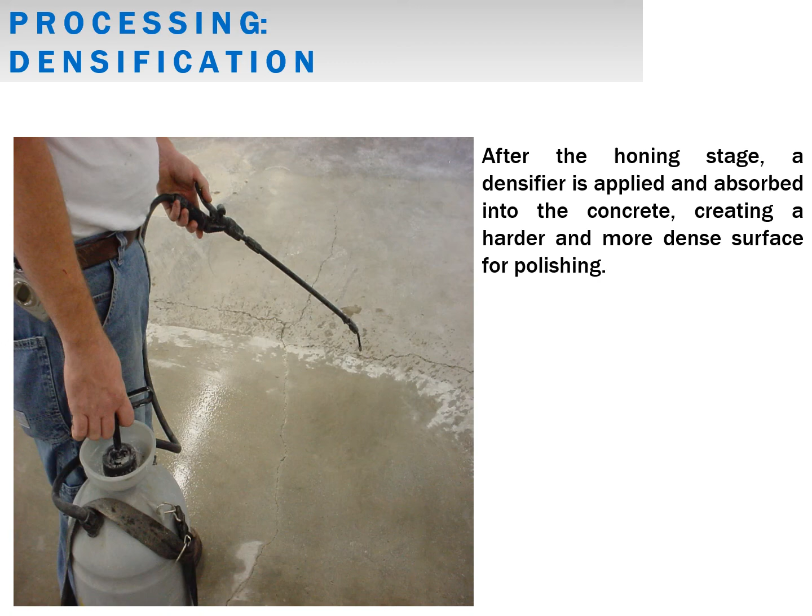Following the removal of all those fine scratches, we're going to move into the densification stage. Densification is a very important concept to understand whether we're talking about polishing concrete or polishable overlays. It's often required simply to create a more dense surface, which is harder, more abrasion resistant, and therefore more resistant to topical staining, and adds to stain resistance in general.

So what is densification? Basically, it's a chemical reaction between a silicate and calcium hydroxide, or free lime, which is in the concrete or polishable overlay. This material, the calcium hydroxide or free lime, is left over after the Portland cement hydrates. There's excess calcium hydroxide, and typically when it's in the surface of the concrete, it is free to react with the silicate once that silicate is introduced to it.

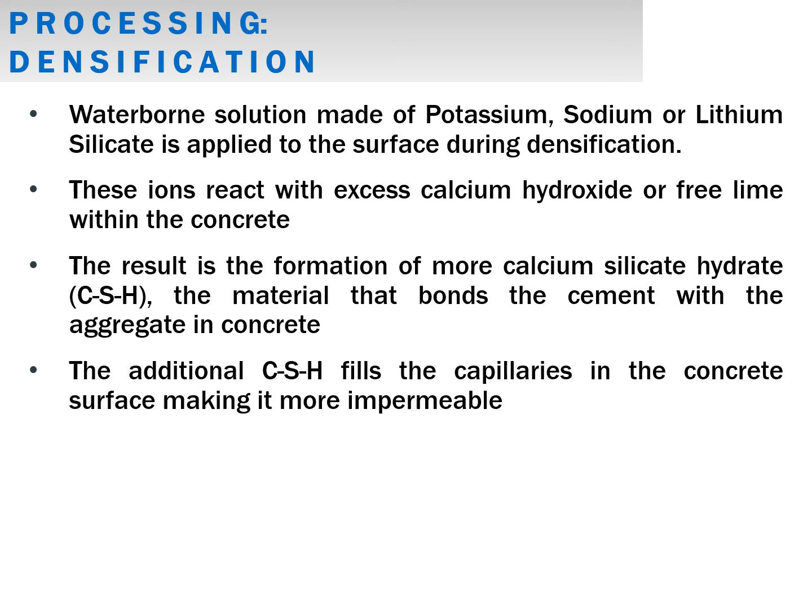We do this through the use of a potassium, sodium, or lithium silicate. That is referred to as the carrier - the potassium, sodium, or lithium - which carries the silicate into the surface of the concrete where it reacts with the calcium hydroxide to form a product called calcium silicate hydrate. This material is like a gel that will fill in the capillaries in the soft surface of the concrete, and this is how we make it a more dense surface.

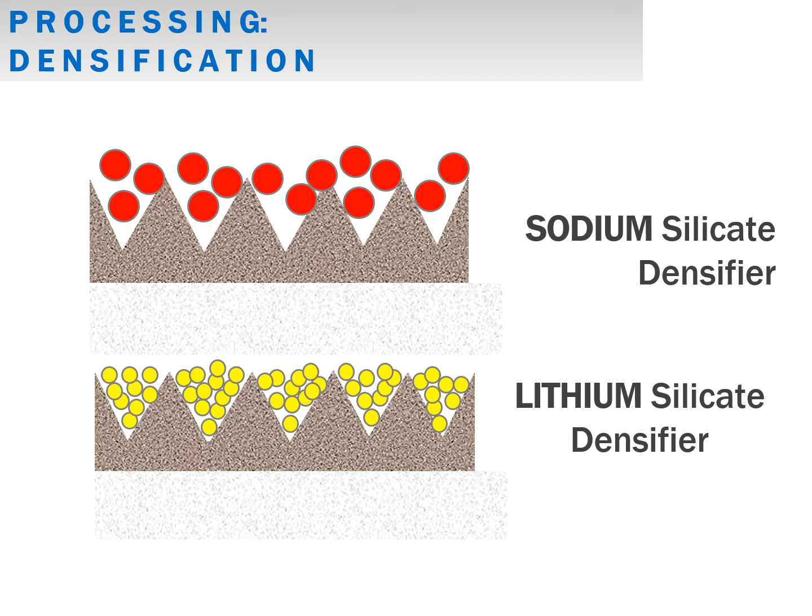So what is the difference between a sodium, potassium, or lithium densifier? Basically, it comes down to a question of molecule size. A sodium molecule is much larger than a lithium molecule. Therefore, when you have a lithium silicate densifier, it's able to carry the silicate deeper into the concrete surface, where it's able to react at a deeper level with residual calcium hydroxide. The net benefit is a deeper penetration and therefore deeper densification of the surface - it becomes much more abrasion resistant. For this reason, lithium densifiers have become pretty much the go-to densifier within the industry when it comes to polishing concrete.

So after densification occurs, we're going to jump into the polishing phase. This is where we actually start to get the shine to appear on the polishable concrete or polishable overlay. The grit sizes for the diamonds will range anywhere from a 200 to a 3,000 grit.

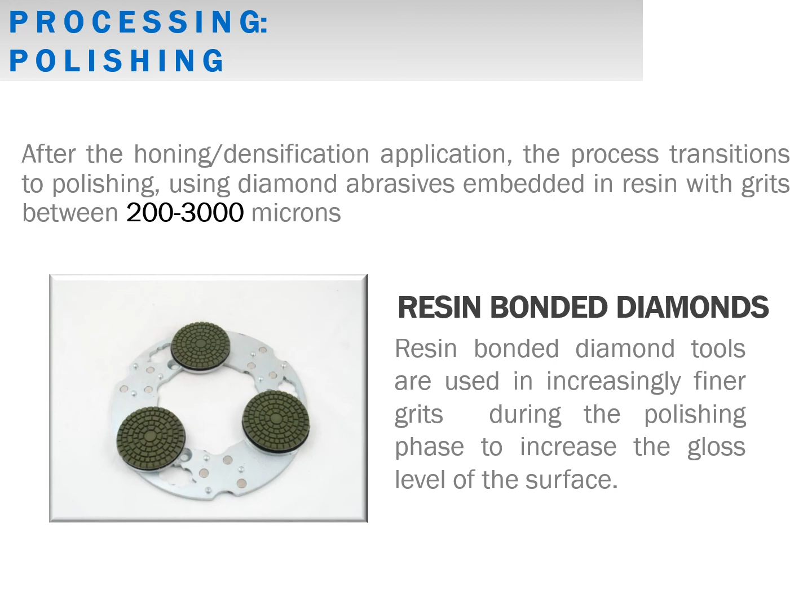This is where grind and seals and full polishes start to part company. For instance, with a grind and seal, we may use a 200 or 400 grit size on the application and then stop, at which point we'll put on a film forming sealer. With a full polish, we're going to continue taking it up to 1,500 or 3,000 or even higher. With each successive step in a full polish, you're continuing to close off and refine the surface of the concrete, giving you that full polish look.

So the last step in processing your polished concrete or polishable overlay is protection. Protection for a full polish system includes the use of a penetrating guard. The penetrating guard is burnished into the surface - this will enhance the sheen and increase stain and abrasion resistance. This is where the high-speed burnisher comes into play. Penetrating guards have to be heated up to a certain level in order for them to react the appropriate way.

As far as a grind and seal application is concerned, we're going to stop much earlier in the polish process and apply a film forming sealer. Regardless if it's a full polish or a grind and seal, we want to protect the newly polished overlay from spills and contamination by installing a temporary breathable floor covering. When we do install it, we want to make sure we go wall to wall. If we do not, we get differential drying of the overlay, which could lead to discoloration.

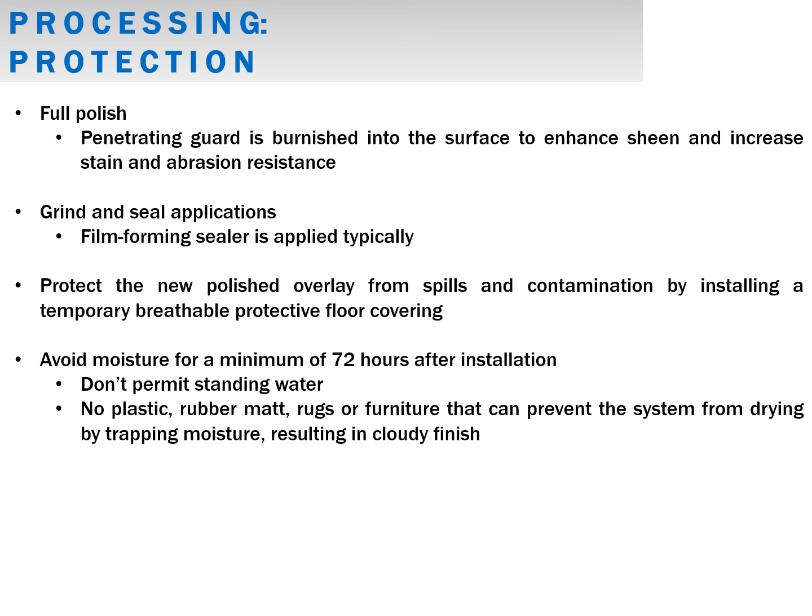We also want to avoid moisture for a minimum of 72 hours after the installation. We don't want to permit any standing water, and don't place any plastic, rubber mats, rugs, furniture, or such over the overlay - again, this will prevent drying evenly. Those types of items will trap moisture and result in a cloudy finish.

With regard to maintenance, whether it be a full polish or a grind and seal, we want to make sure we strictly adhere to a maintenance program. And a maintenance program has several aspects to it - there's a daily, periodic, and annual or semi-annual maintenance plan that we need to stick to.

On a daily basis, we want to make sure we dry dust mop to remove any dirt and grit on the surface. Periodic maintenance can be anything from daily to weekly to monthly or bi-monthly - we want to hit it with an auto scrubber with a pH neutral cleaner and a white or red pad. We need some agitation to remove dirt that may have been ground in. It's imperative that after an auto scrubber we do a clean water rinse. Any chemicals left on the surface of the grind and seal or full polish can act as a magnet for additional dirt to collect, so we want to make sure we remove any residual chemicals with a clean water rinse.

Buff or micro polish is recommended on a regular basis, anywhere from weekly or bi-monthly to quarterly. A buff or micro polish helps bring back the shine to the surface, whether it is a grind and seal or a full polish. We can adjust our timing based on the type and amount of traffic the floor is going to be exposed to.

Annual and biannual maintenance includes reapplication of the topical maintenance. Whether it's a grind and seal or a full polish, the guard products or sealers have to be maintained, often on an annual or biannual basis, depending on the type and amount of traffic over the surface. Grind and seals require more maintenance because they're maintained similar to how a resilient floor covering is currently maintained—that is, maintenance of the sealer and/or wax used over the surface.

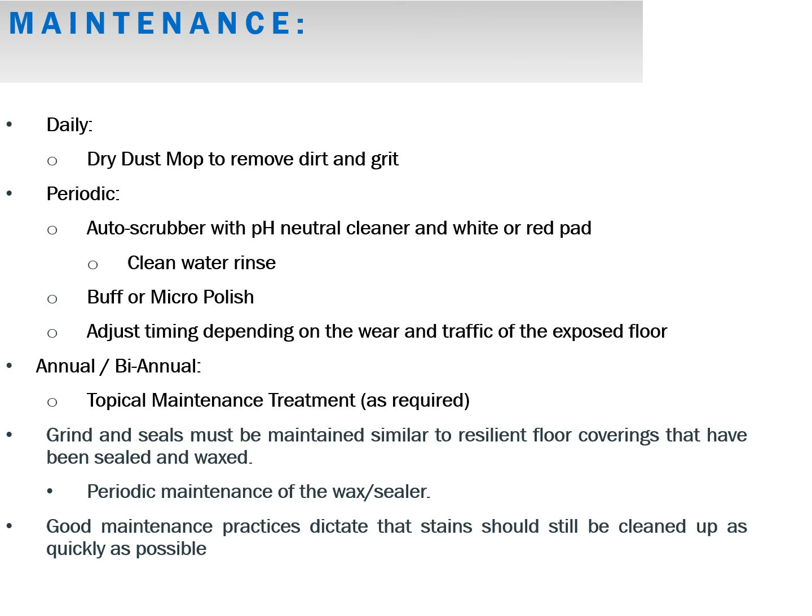So let's talk quickly about market opportunity and how it may fit into your business.

Currently, the best estimates for the market in the United States show that about 5% of total commercial hard surface flooring, or just over 80 million square feet, is polished concrete. Polished concrete is expected to grow by 25 to 30% through 2020, and it's growing at a much faster rate than traditional hard surface flooring.

Retail, including do-it-yourself home improvement stores such as Lowe's and Home Depot, make up about 74% of the polished concrete business. Of the total square footage that is polished concrete, 19% requires extensive concrete preparation.

What this means for us is that consideration of an overlay is often the only answer. 65% of all polished projects are renovations, and 75% of those will incorporate an overlay into some portion of the project. You can do the math yourself and see there's an extensive opportunity for the use of overlays in the polished concrete industry.

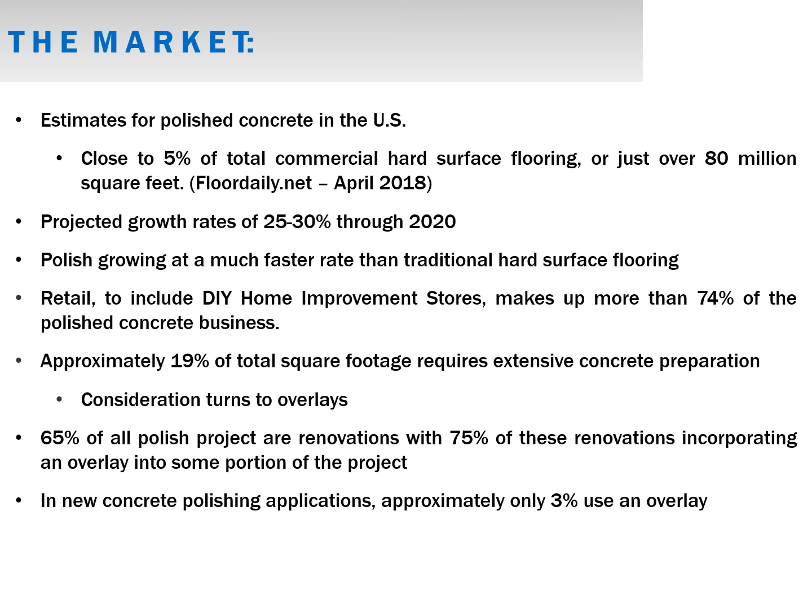With regard to new concrete, given that we have a lot more control over the mix design, polishable overlays are used very rarely when it comes to new concrete.

As far as the business opportunity is concerned, market research confirms the market for polished surfaces is continuing to grow. We see polished concrete and polishable overlays making their way into smaller retail, commercial, and office spaces, as well as into the residential market. As a hard surface alternative, it is comparable with tile, and as a flooring alternative, it really is the only unique finished flooring surface out there.

For this reason, it appeals to the design community, given that they have the opportunity to design using tints, aggregates, terrazzo strips, leading to basically unlimited design options, which is very appealing to the designer.

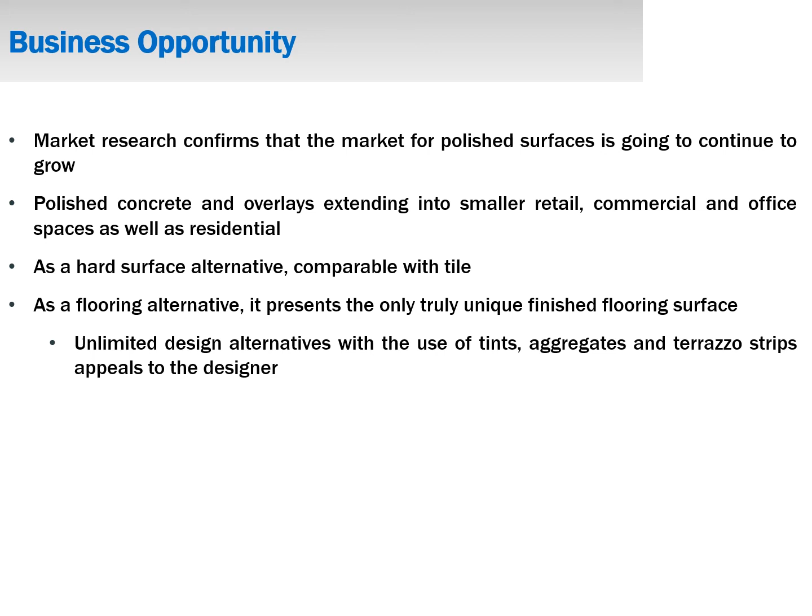Additional business opportunities: whether it's a grind and seal or a full polish, they can provide additional revenue streams through ongoing maintenance. With the grind and seal, by definition, it requires use of a film forming sealer, and as we said earlier, those film forming sealers and acrylic waxes installed over top have to be maintained on a fairly regular basis.

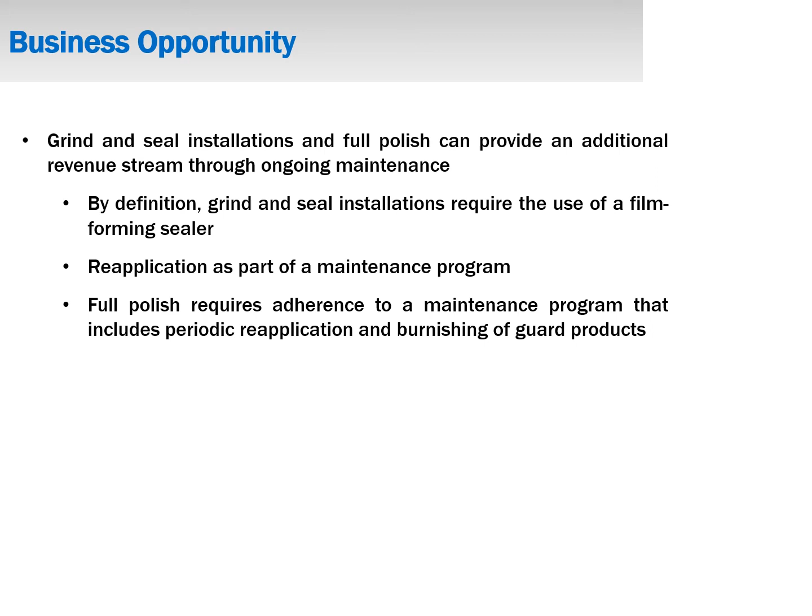So reapplication of those sealers can be sold as an ongoing maintenance program. Even with full polish, where you're using a penetrating guard that has to be burnished, those penetrating guards have to be rejuvenated on a biannual or annual basis, not only to bring the shine up but also to add additional protection to the surface.

So what about your commitment if you decide to go down this road? Polished concrete overlays do require commitment, and it's very simple: you have to commit to investing in the tooling, equipment, chemicals, and talent. The talent means the operators of the grinding and polishing equipment. Just because an individual knows how to do substrate prep and create a CSP3, it's a different skill set to polish a concrete slab or a polishable overlay.

So commit to providing your personnel, your talent, with the education they need to process and polish concrete. We encourage you to support industry organizations. The Concrete Polishing Council does unbelievably helpful work in terms of providing detailed direction and guidance on how to polish concrete.

We also ask you to commit to using resources provided by manufacturers of polishable overlays. Manufacturers like ARDEX have specifications where we detail installation practices and processes to achieve reproducible results. As we said earlier, product control plus process control equals predictable results. This is why you want to commit to using resources provided by manufacturers like ARDEX, and also take advantage of the educational opportunities offered by manufacturers, whether of the overlay itself or of equipment and tooling. Take advantage of those opportunities.

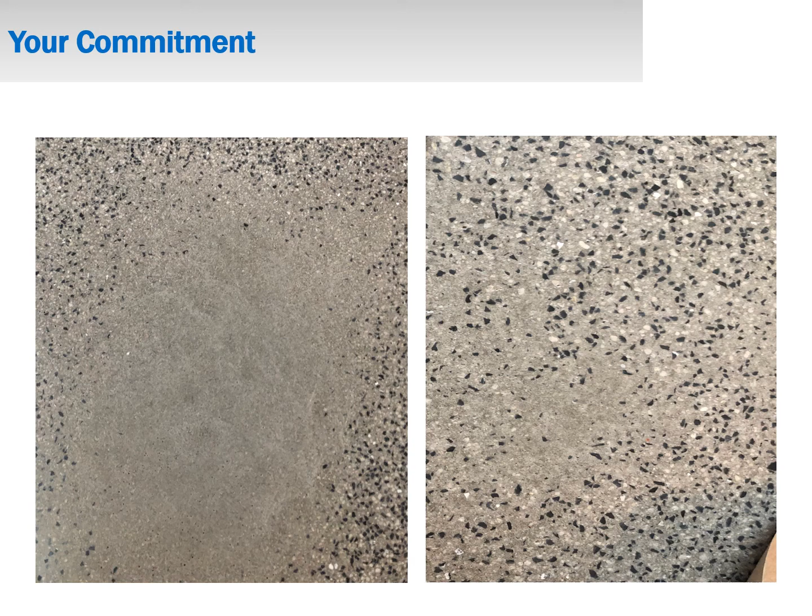The installer had presented them with a 2x2 mock-up showing a very even dispersion of aggregate, almost a terrazzo-like look, so when the full installation went down and these spotty areas appeared, the end user rejected the floor. With a 10x10 or 9x10 mock-up, these types of spotty reveal can be shown and dealt with prior to the general installation to avoid the potential for a floor being rejected and an ensuing claim.